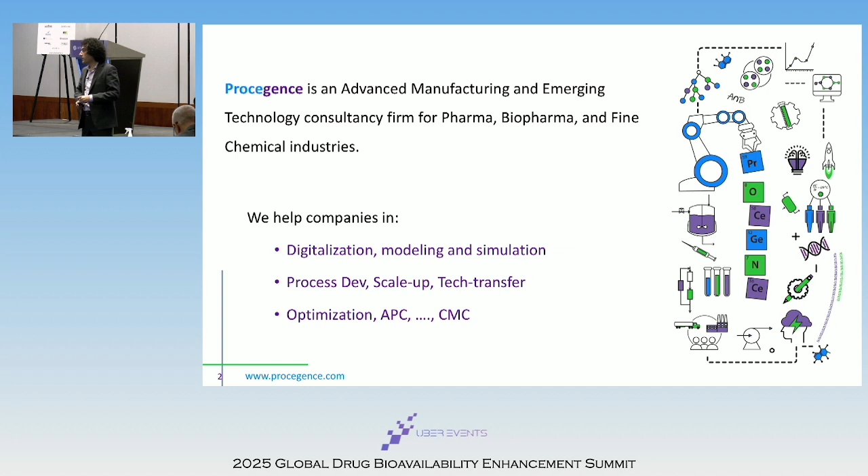So the first year was very challenging, but we grew. I have no financial investor, no partner, and now we have about eight people. So that shows the value of the service that we do. That has been organic growth. Our clients are very happy, pay for the services, and we have a couple of products in the market that help the companies to fast approval and also fast process development.

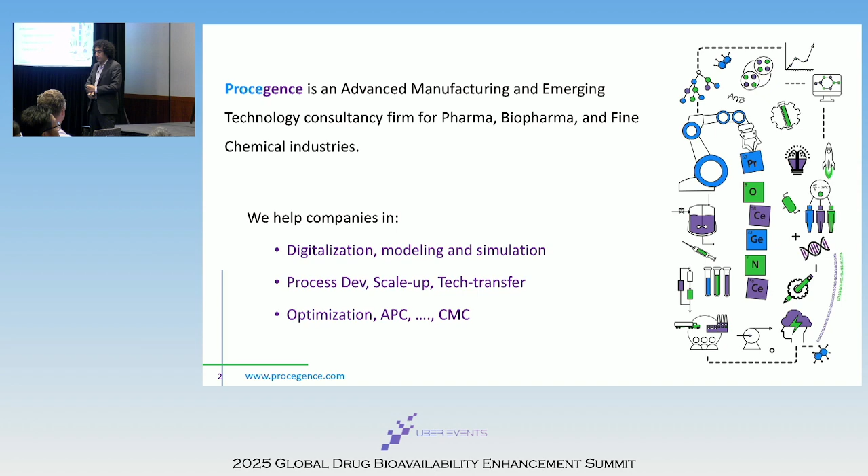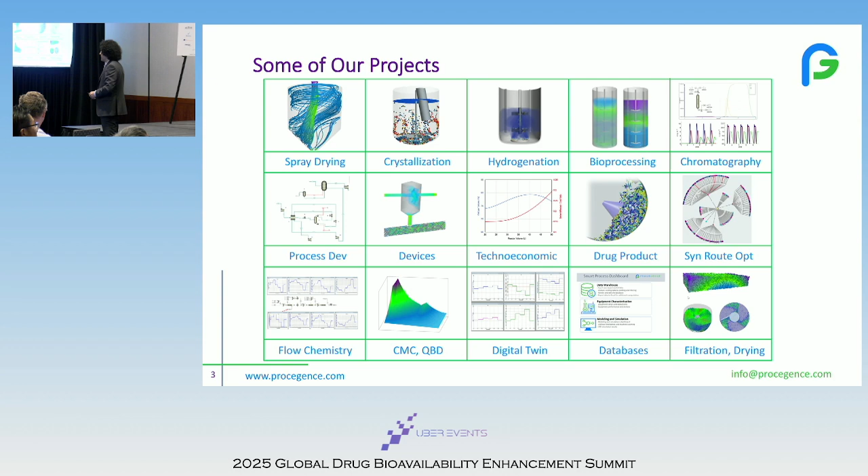So very diverse services and products, different modalities, different sizes of companies, all over the place from Korea to California. Here you can see some examples in small molecule, biologics, drug device combinations, and also some non-pharma. So today I'm just focusing on spray drying, the first one, but if you have a question on the other areas, happy to answer questions and discuss more.

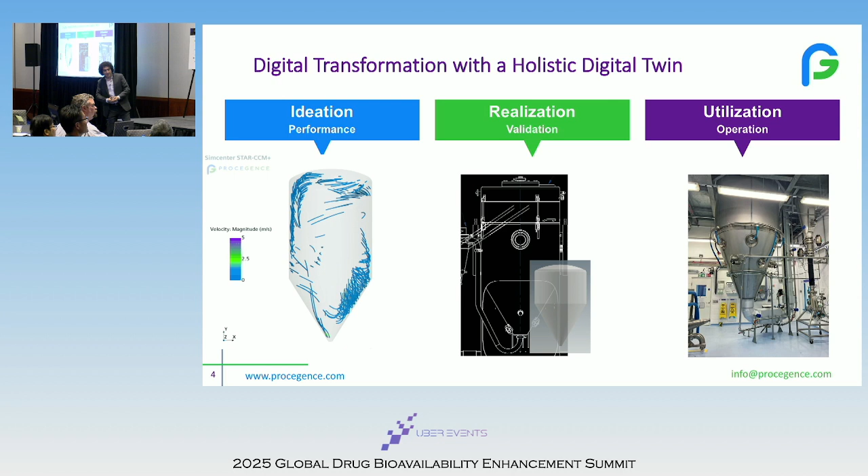So that's the approach. So the model that we use is like, oops, sorry, wrong button. So here is a kind of digital sandbox. So we make digital models on the computers. We try different parameters, different properties, different materials, without costing any money. I mean, you have to pay me to do this, but not the cost of the material or the equipment. Then we have to do the validation when we find the best result.

This validation, again, wrong button, sorry. So this kind of validation could be done at a smaller scale, at the lab scale. Then we can use the validated models for scale up to very large manufacturing equipment.

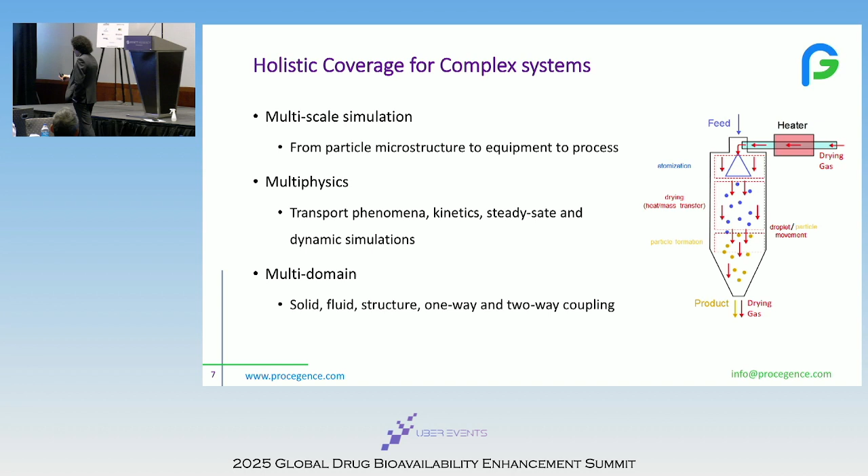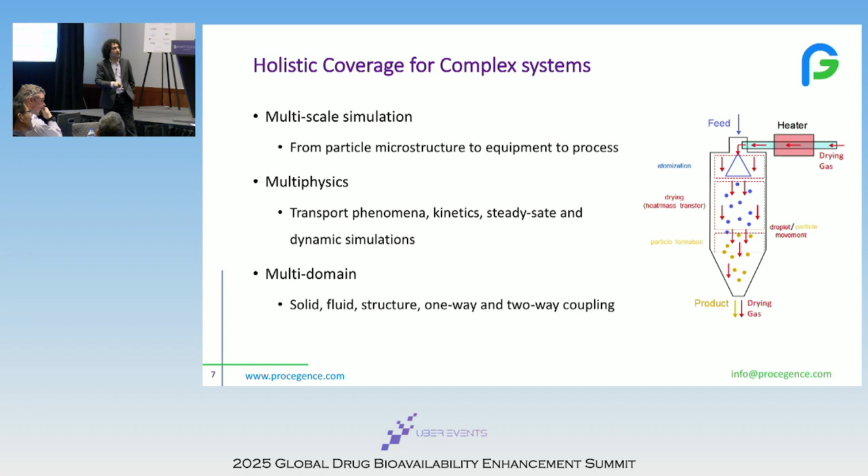Similar to crystallization. Crystallization is also a very challenging area, so we do a lot of services there. These are what we call Stefan problems, moving boundary conditions from the mathematical point of view. From the pharma side, spray drying or crystallization is at the end of the line. The material is expensive, and most of the CQAs of the material are defined there. Residual solvent content, particle size, stability, everything is defined here. So a very sensitive process.

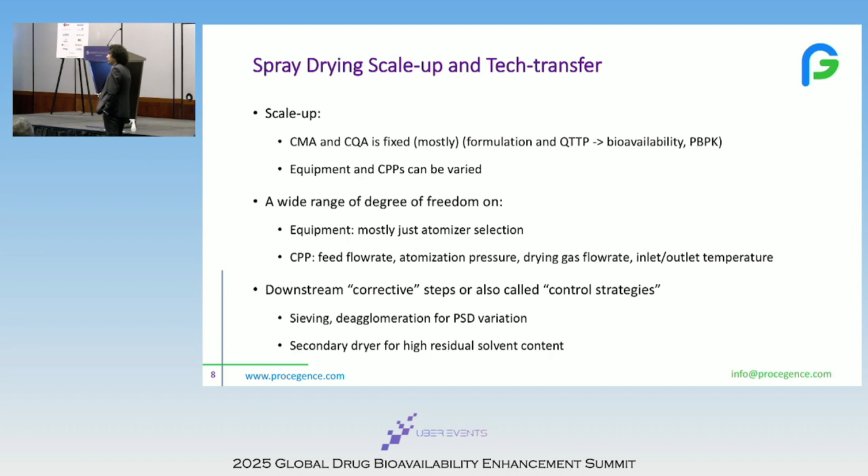Now for the scale up, as I mentioned, the CMAs and CQAs are mostly fixed, coming from the lab scale. That's what we developed during formulation and development. So we are not going to change the formulation. I'm not going to change the API to excipient ratio. And the CQAs for the bioavailability and the QTPP, we don't change. But what we can change is the equipment: what type of nozzle I'm using, what atomizer pressure, what drying gas temperature. These are CPPs.

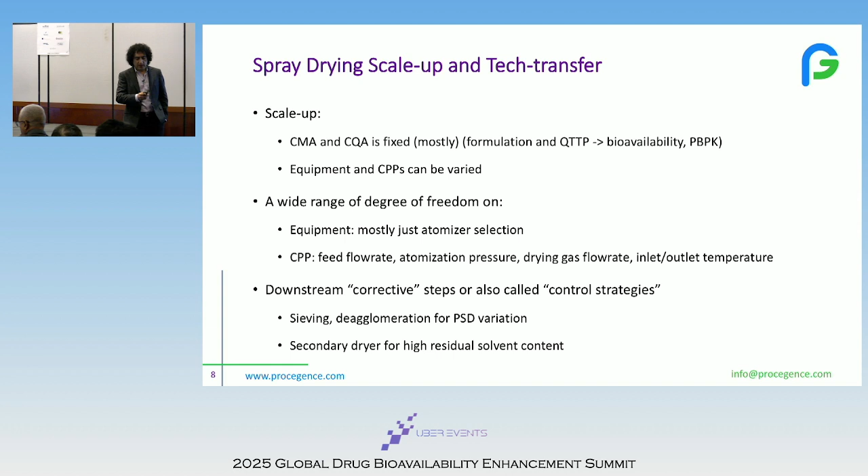That gives us a wide range of freedom to optimize our process, or to develop a design space: if I run at this condition, I can achieve that CQA. There are also downstream corrective steps that we call the control strategy in the CMC submission. If something goes wrong in my spray dryer, I can run my secondary dryer for a slightly longer time to get to the residual solvent content that I want. Which is not efficient, not optimum, but that's been common in the industry these days, right?

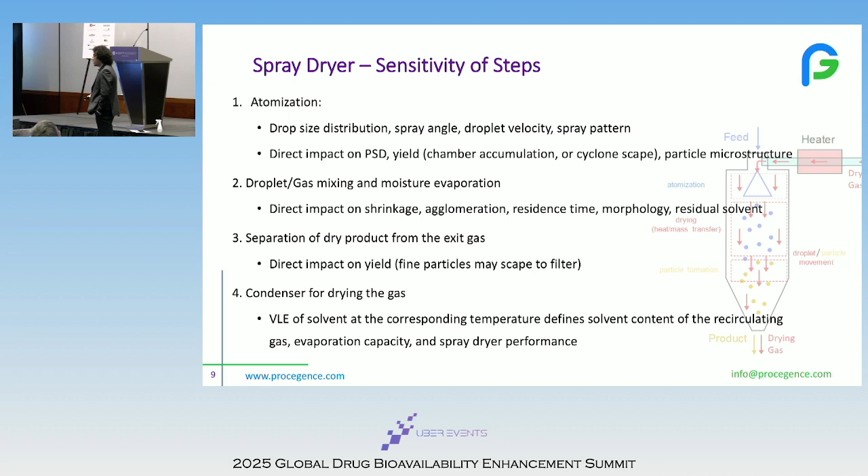So in terms of the sensitivities, we have atomization, which is a very important step in spray drying. From the atomization, the droplet size distribution is going to be changed, the spray angle. We have droplet and gas mixing and the evaporation, which gives us the shrinkage and how fast we are drying the particles. It's going to impact my component segregation from the surface to the core.

So if we want to have a perfect kind of mixing and keep it in the solid solution, we need to have a faster drying or a slower drying. So it depends on the molecular weight of the excipient versus API. Or if you have mixed solvent, let's say ethanol and water, or just pure ethanol. Ethanol water, now the API is soluble in ethanol, and the excipient is soluble in the water, but the vapor pressure is different. So during the spray drying, the ethanol evaporates first.

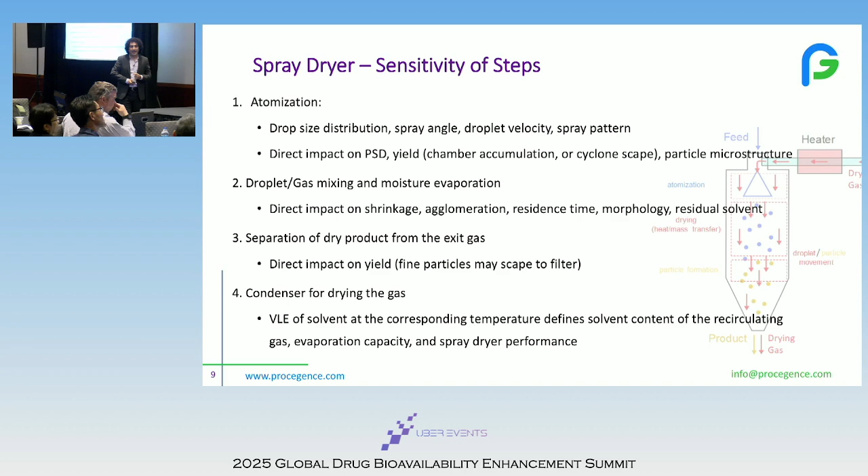So my API comes to the surface first. I end up with more solid on the surface of the particles. Now we have stability issues because most of these APIs are not supported or protected by the polymer matrix, right? So that's why we control this kind of drying rate inside the chamber to maintain the quality of the material as well. So we have to start from developing this knowledge.

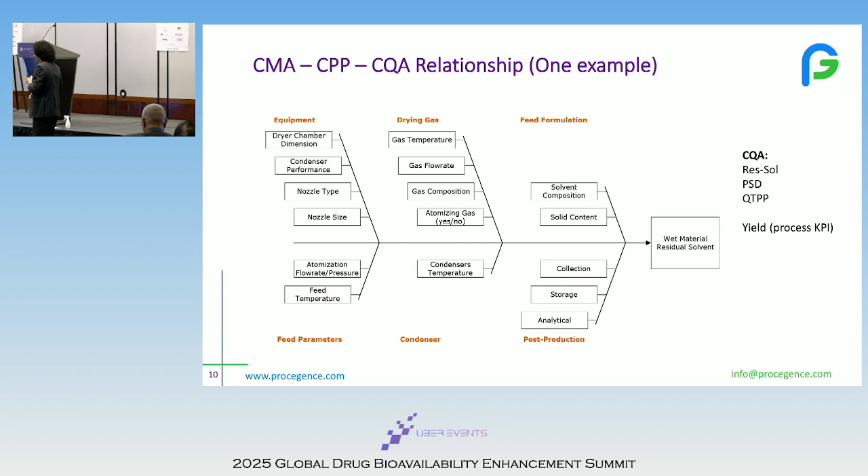As I mentioned, this is based on QbD, so putting all the parameters that are connected to each other and give us different CQAs. So this is a fishbone diagram, which we can develop for different properties. In this case, I'm starting with the residual solvent content, but you can develop the same thing for particle size distribution or even the process yield. What is the connectivity between the parameters, right? So if I can list 100 process parameters, then I have to run sensitivity analysis to figure out what are my 5 or 10 critical process parameters, right?

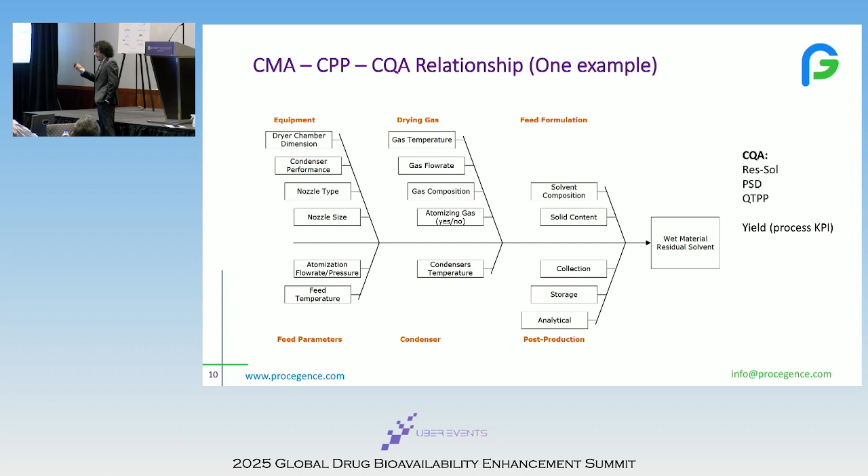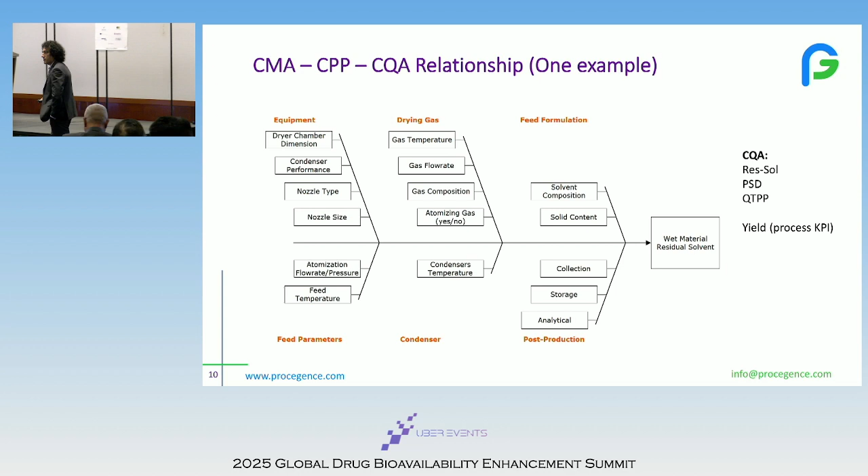So developing this knowledge of what is connected to what, and if I change, let's say, my nozzle type, what will impact my atomization, which is going to impact my particle size distribution, right? So that's where the modeling and simulation starts. Sitting together with the scientists, with the biologists, with the formulations people to think about all these things that connect together. So that's where we start our model. We don't start from math, right? We start from the science of the formulation and the biology.

So starting from atomization, I'll just go very quickly through the different steps. The first approach would be trial and error. We would have different options for orifice and the core, and also the material properties. If I have different HPMC or PVA or excipient in my solution, now the rheology of the liquid could be shear thinning or shear thickening, and that's going to have an impact on the droplet size generation. Higher temperature, higher pressure, or higher atomization gas is also going to impact the droplet size distribution. So that's why this kind of full factorial DOE is a combination of the equipment, the process parameters, and also the material properties.

We end up with about 600 full factorial combinations, which is not possible to do in the lab, right? Then we could do some study on what is the evaporation capacity of the spray dryer, what is the higher solvent content, what is the gas temperature. Then we get to this center region, which is more efficient to do the high fidelity models for. For example, now we started doing CFD to predict different combinations. This is very hard to read. These are the nozzles from Spraying Systems, like SK1627s and 7625, those combinations of the orifice and the core. Then we get this histogram of the droplet size distribution at each location at a time, right?

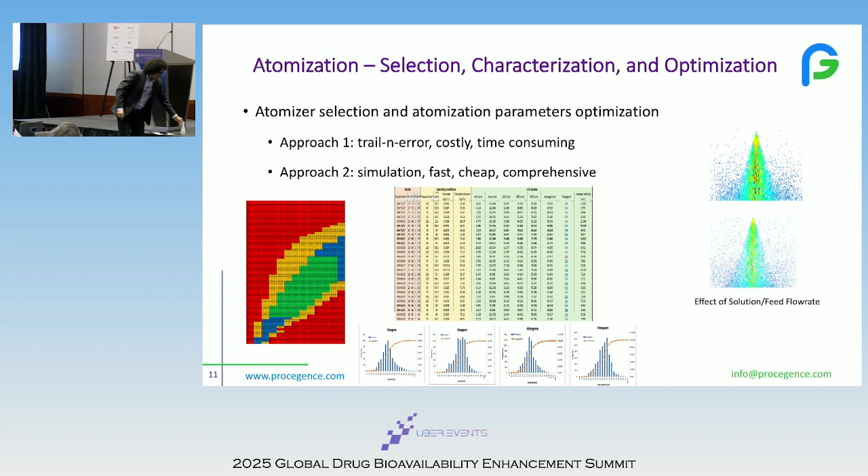So atomization, you are all familiar with that. Here is my spray, which is for my hair anyway, so I use it for demonstration here. So this is water, right? And now you can see with this water, with this atomization pressure, I have this wide angle. Now I'm opening up the thread, and what happened now? It's the same material, same pressure, but different. Now we make a jet, right? Instead of having a spray, with the same equipment, same material, now I have a different droplet size distribution, different velocity, different spray angle.

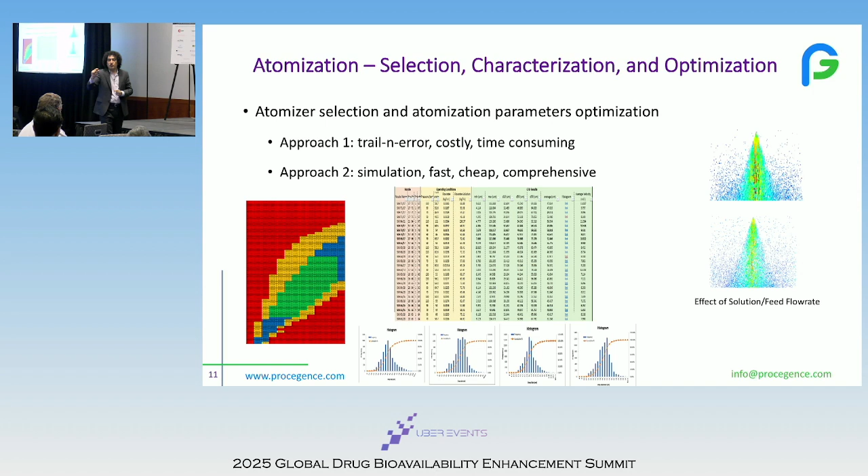In the GEA equipment, it's called a spacer. How thick is it, Andy? It's like half an inch, right? A ring of Teflon that we put on the lance. Then the location of the lance in the chamber goes up and down by about half an inch, and it's going to have a significant impact on your droplet size distribution. It's just where I'm releasing my atomized droplets in the gas, right? Just by half an inch, you can change your particle size distribution quite differently.

So that is one example from this simulation. You can see we are doing this kind of atomization simulation there and getting the population balance at different vertical and horizontal locations.

And why is that important? To develop these histograms to find the velocity of my droplets hitting the wall at this location, and is it still gooey, or is it wet, or is it sticky, but I have enough energy to bounce back. When I hit the wall, it's dry and bounces back. Or no, it's a slow velocity, still sticky, it's gonna hit the wall and stick there, right?

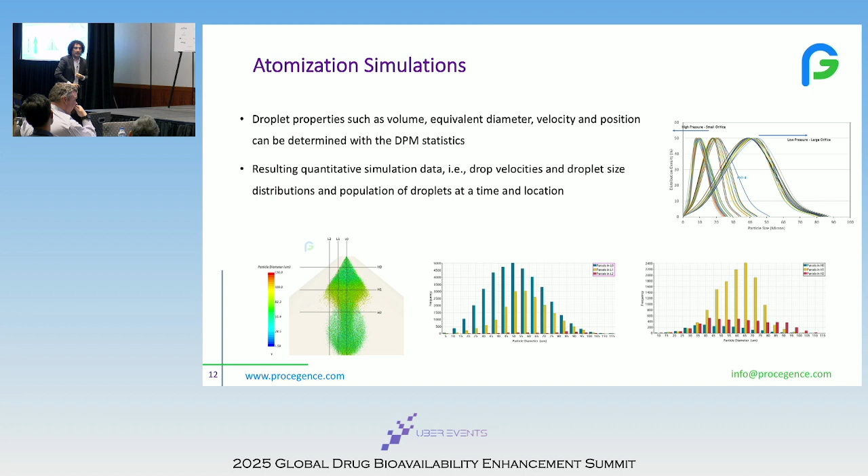Or what happened at the center, here you can see, now we would have coalescence. The droplets are gonna hit each other and coalesce together. So when you get an SEM image from your final product, you can see two different agglomerations. There might be just physical particles sticking together. That's the agglomeration from the cyclone. But if you see something like a bridge between the particles, that is happening during this stage, right? So optimization of the atomization and understanding how this works is very important.

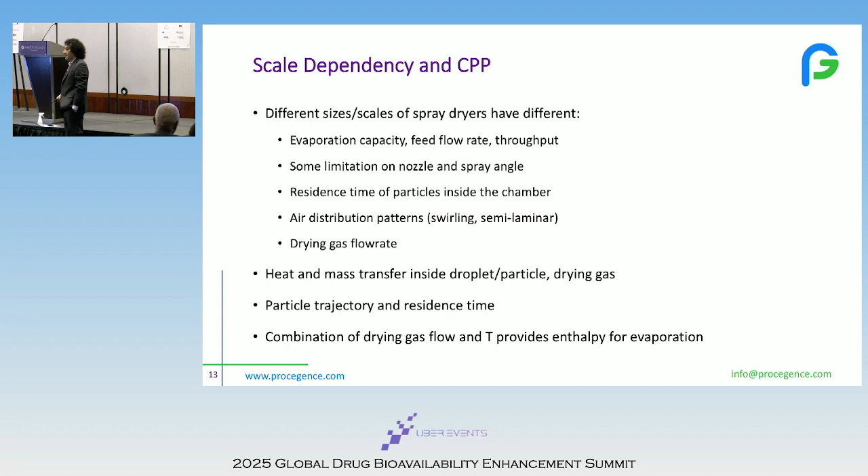So now we go into scale dependencies, there are scale dependent and independent phenomena. In general, for example, the heat and mass transfer, when you think about, let's say, bioprocessing or hydrogenation, the KLA, these are all scale dependent phenomena. But reaction kinetics is scale independent, that's a thermodynamic property, right?

So for a scale up of the spray drying, we have to consider all of these properties or aspects that are scale dependent when I'm increasing my chamber size, or when I change the diameter to height ratio of my chamber, so the residence time would be different in the chamber, right? These are all giving us different evaporation rates, different particle shrinkage time.

Now you can see here we're comparing the PSD3 and PSD4. These are normalized heights, based on the same PSD4. And when we design these evaporation models and put them in the simulation, now we can predict how much evaporation I have, what is the mass transfer gradient that we have at each stage.

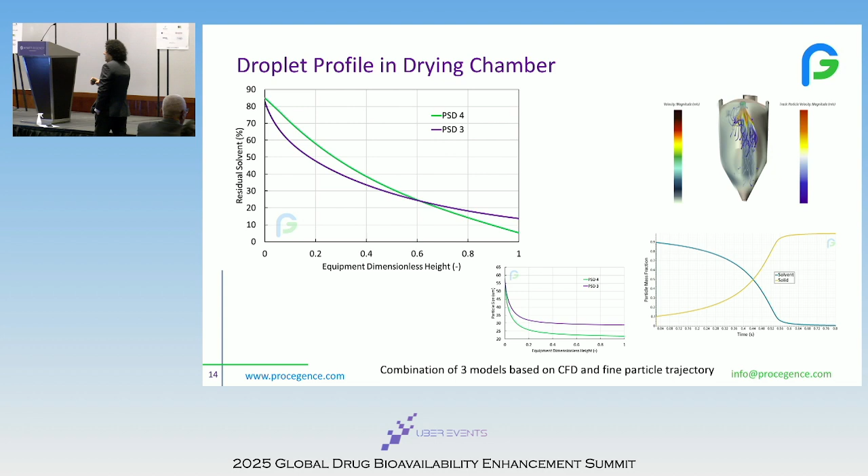And if I want to transfer from PSD3 to PSD4, or I have a site in Europe that has been using PSD3, now I want to come to the US with the PSD4, how we can do this kind of overlap of the knowledge and this kind of tech transfer very, very quickly. In this case, you can see PSD4 has a higher capacity, even with the same rate. So the PSD3 becomes kind of flat, because it has a lower evaporation capacity, this is smaller equipment, right? But at the same rate, we would have more capacity from the PSD4.

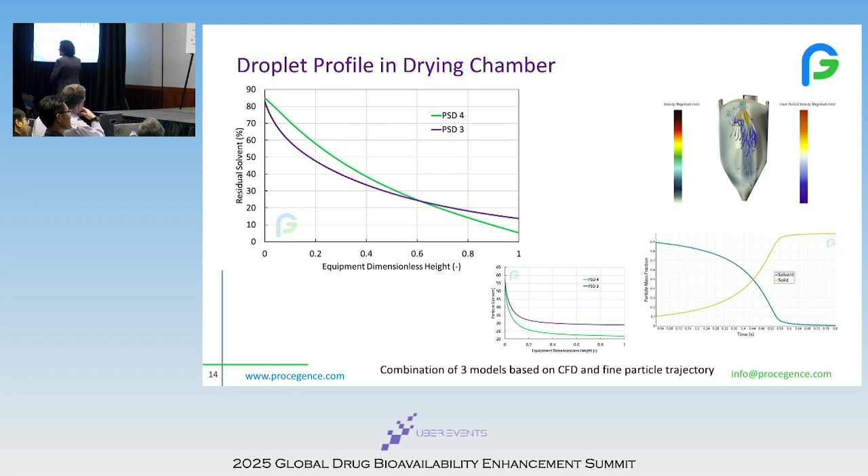That is kind of non-trivial because it's bigger equipment, but when you compare the ratio of residence time, PSD3 and PSD4 are almost the same height, but the diameter is different, so the residence time inside the chamber is different. That is the residence time in the chamber. So this is for the same material, same properties, same thing.

We have D10, D50, D90. Now we can see D10 stays a longer time in the chamber. D90 is heavier, is larger. It leaves the chamber in a shorter time, right? Now, what's going to be the problem? For small particles, the surface to bulk ratio is larger. Now we have larger mass transfer flux because the surface area is larger, right? And also we have larger heat transfer, so they are exposed to a higher temperature.

Now my D10 stays in the chamber for a longer time, which is time, right? And exposed to higher temperature, which is activation energy. So now think about the reaction kinetics. Most of the degradation, most of the impurities are happening in the D10. D90, we have large particles. Now the diffusion length is larger, so it takes a longer time for these particles to dry, and they stay a shorter time in the chamber, right? So most of my residual solvent will be in D90.

So we had a client 4 years ago, and they had an impurity problem. I told them, remove your D10, physically remove your D10, and your chemical purity goes up. And the formulation guys said, no, that's BS, it's not gonna happen. So they tested and it worked, right? Because it is science. I'm exposing the smaller material for a longer time, and we're gonna have more degradation there.

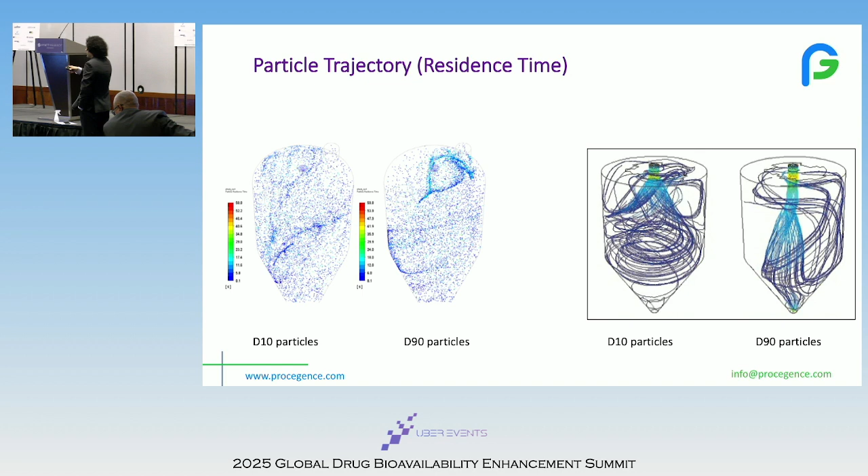Now, especially if you are designing the secondary dryer, it could be double cone, it could be tray, whatever design. Now you have to think about, if you have an average bulk moisture content, you have to normalize based on each particle bin. My D10 is gonna dry faster, in a shorter time, and my D90 is gonna take a longer time to dry. So we have to do this kind of breakdown of these particles and the moisture content per size of the material.

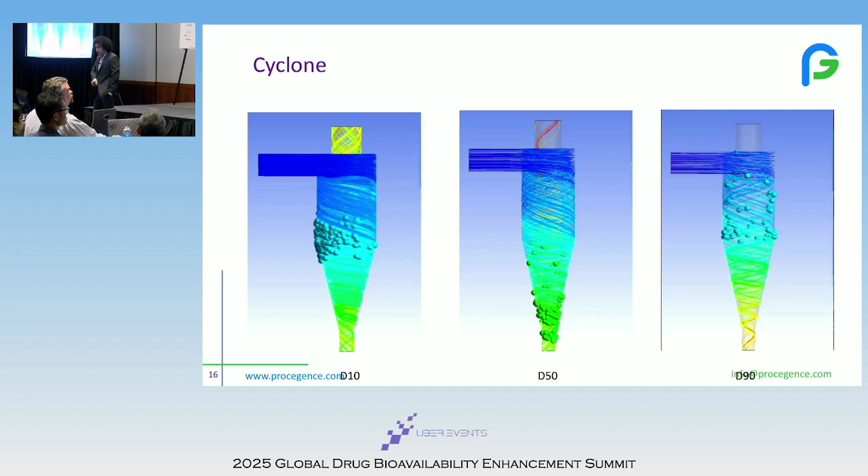Cyclone, so that's more for the design of the cyclone, and now I'm going to get into the regulatory submissions, how we are using the models to support the CMC. These models could be used for risk assessment, process development, and also the PAR and NOR and the design space. This example is for cyclone.

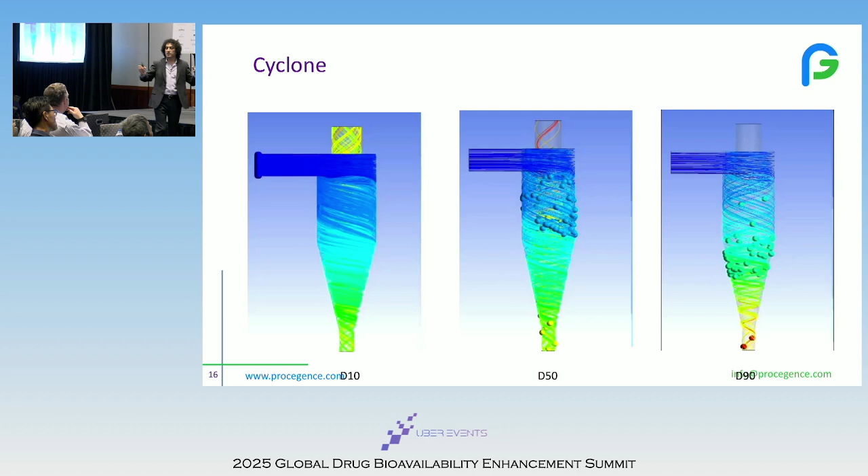That was the efficiency of the cyclone, right? You can see most of my D10 kind of escaping the cyclone at this flow rate of the gas. Most of the D90 is going to be all captured. Now, if you are changing the gas flow rates, my D10 would be less, and you know the particle size distribution is the statistical distribution of the sizes per bins, right? When I'm losing a portion of my D10, the whole thing shifts toward the D90, right?

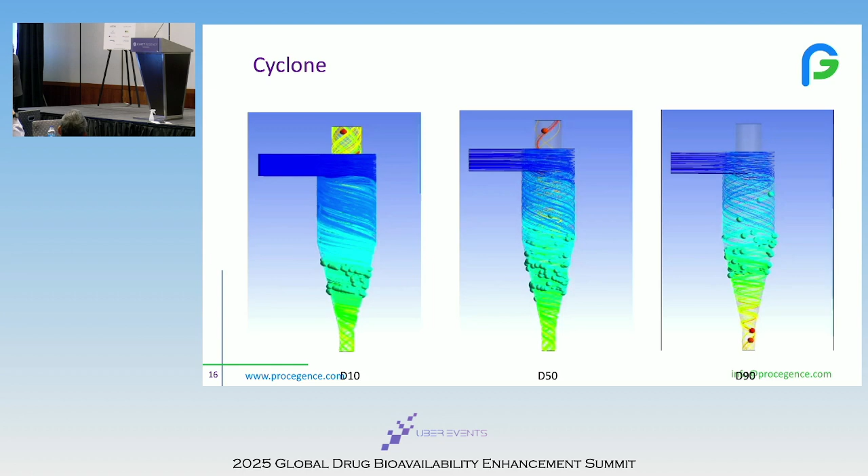That's the impact of the flow rate of the drying gas on your particle size distribution. Nothing to do with the evaporation and the shrinkage yet, right? It's all in the cyclone. That's one example. We have all the problems in the chamber later on, so I'm gonna get to that as well.

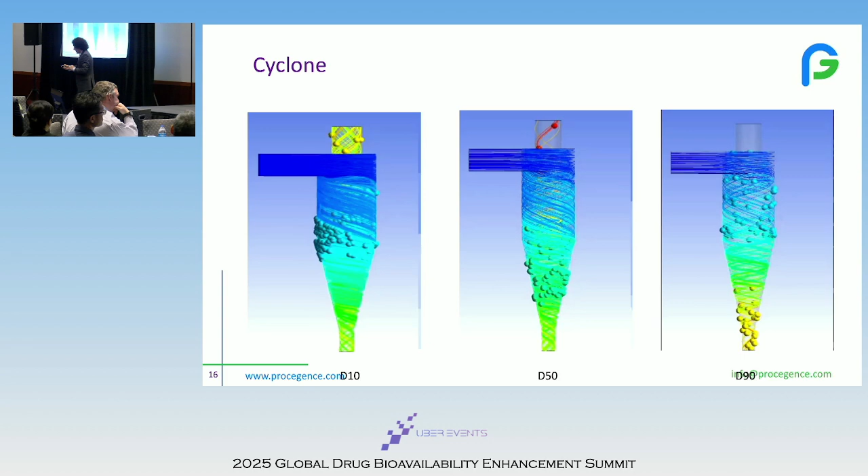So now we get into parametric studies, running a lot of what-if conditions. Now we can think about what if I keep my feed flow rate fixed, drying gas flow rate fixed, but change the drying gas temperature. What would be the impact on the powder temperature and the solvent content? Now we are running this kind of parametric study for different steps, for different intervals, and we get to some kind of knowledge of the connectivity of the parameters.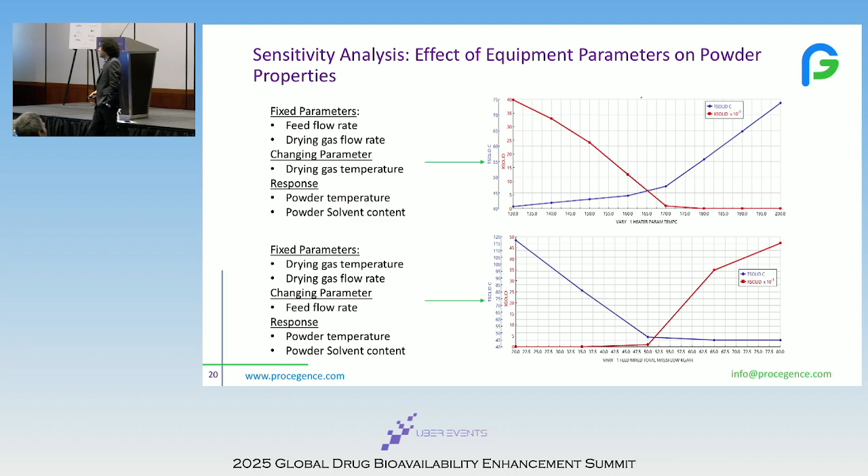So there's no way you could do the same level of exploration in the lab or in manufacturing. Now we are talking about PSD3. When you work with CMOs, how much do CMOs charge per day for PSD3, PSD4? Nobody going to tell me? No. It's something around $100,000 per day-ish, right? So this would cost like $1 million if you want to run it in the lab or in manufacturing.

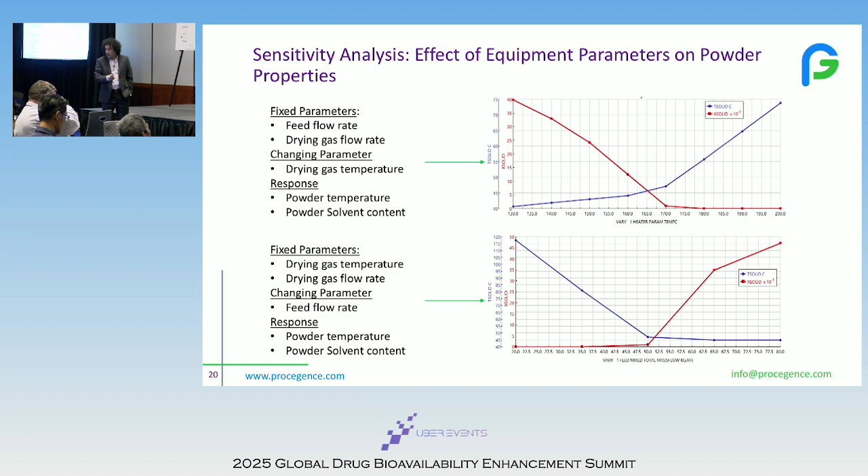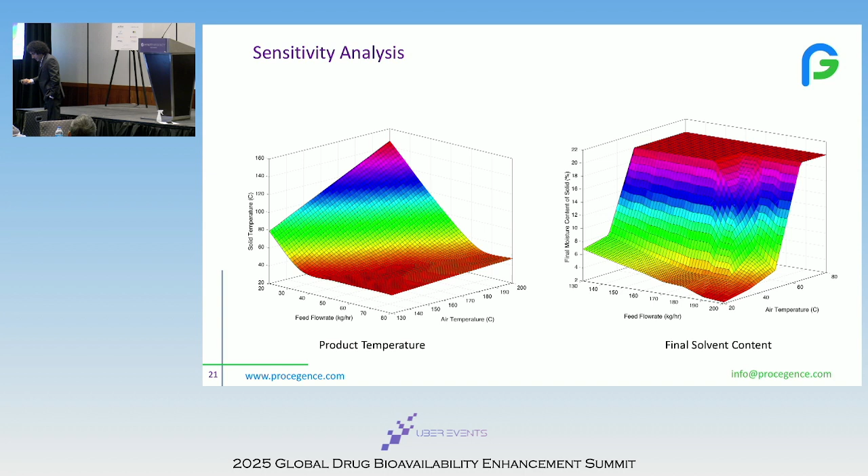So now combining many of these case studies together, we get to this kind of response surface. From here, I can use it for 3 different things. That gives me the design space. If I change my temperature, where I end up in the flow rate or in material temperature, that goes to the CMC package for regulatory submission. This also could go to the advanced process control for dynamic control of the process. If your feed goes down, how I can bring up the temperature to maintain the CQA.

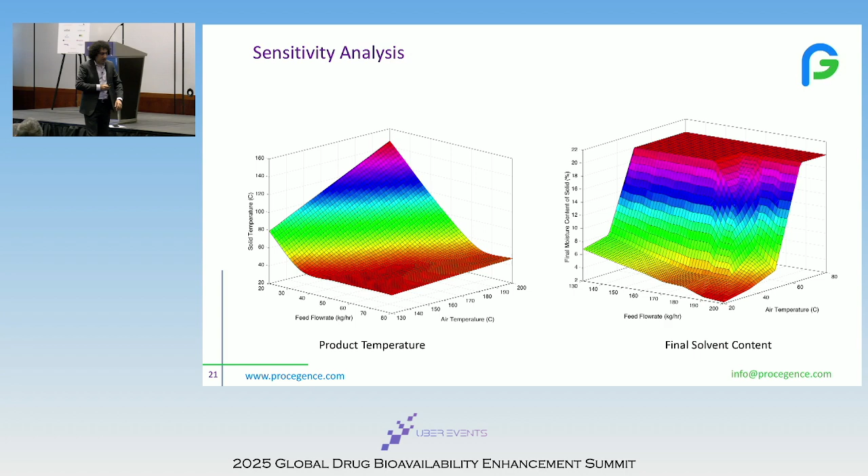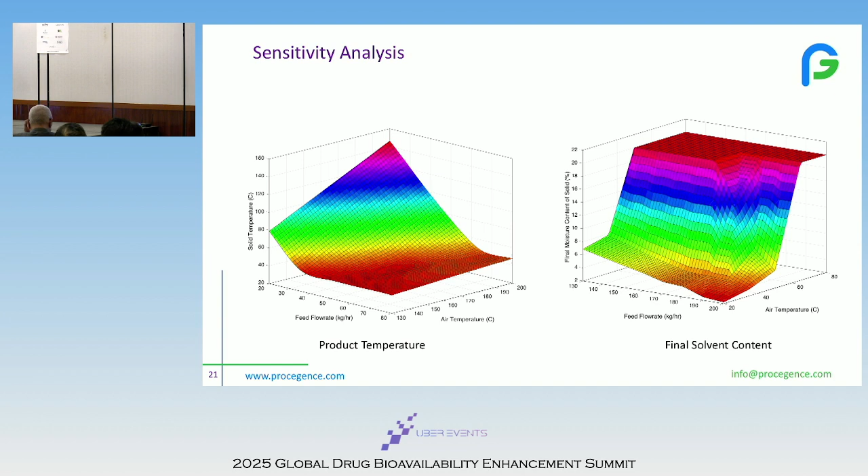You may think that this is very difficult in a regulated industry. We have done that recently, 2 years ago, and I can show you the results and how FDA liked that approach as well. So that's the design space. If you remember, here is more of a theoretical design space. Yes, I can run my spray dryer at 1 million degrees C, but it's not possible in the physical world because it's a very hot condition.

Now we're putting all these limits on what is the lowest solvent, what's the highest solvent content I reach, what's the highest temperature, yield, economy, all of these, and get to this kind of design space that is safe, that I can run my equipment at larger scale manufacturing, and gives me confidence in terms of the quality, yield, and the cost of the process.

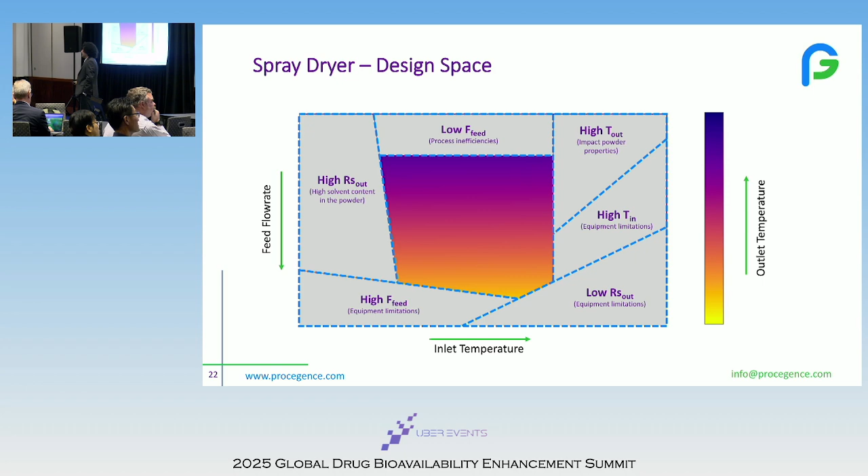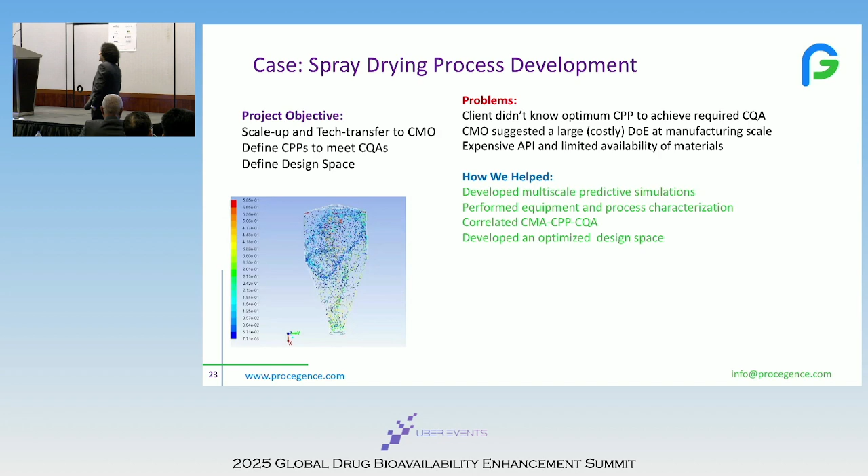They didn't know the process parameters, or what kind of CMA they have to use, or if they have to change their excipient, or how much they have to charge in the feed vessel. So that's the big problem they had, and also they didn't have enough material. They just had like 10 kilos of the peptide. Now running 1 day of a spray dryer needs like 130 kilos of the peptide. What can you do, right?

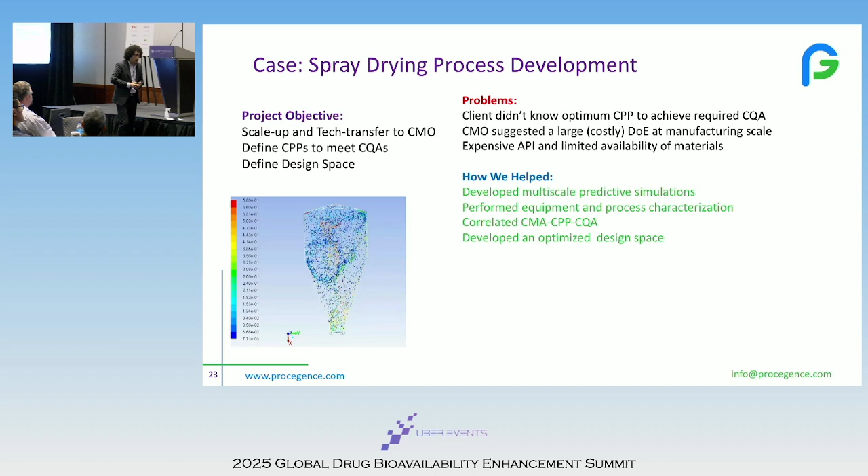So they thought about reconstituting the material and every time making a feed, but then it's not a continuous process. You have to break down every 10 hours to make the feed again. And every time they re-spray dry, because the peptide is heat sensitive, the impurity goes up and up and up, right? So that's why they came to us.

The CMO asked them for a 12-day DOE, about $1 million cost, and so we helped them with developing the models. They had a very fast process development, product development, and they saved $800,000 in like 4 days.

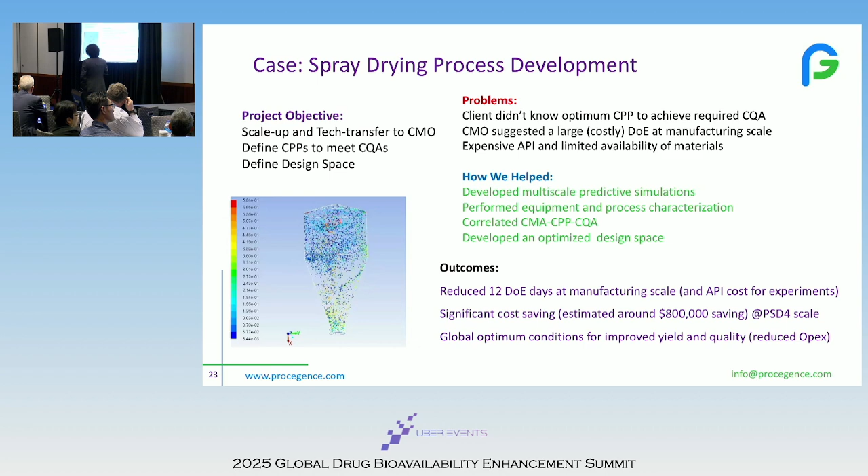You may say, okay, that's a good story, but how about the validation, right? All these models are sexy, colorful, and I can run a lot of smoke and mirrors, right? But when we go to the actual process, we need to also demonstrate the validation. Here's an example from Esteve Quimica in Barcelona. That's our client, and they said, okay, we don't believe in math. We believe in what we see. Show your simulation results first, then we compare with our experimental data. So it was a kind of blind test.

Now you can see solvent content, temperature, and the particle size distribution, and that was a very complex formulation in terms of the solvent composition and the material. We had API, excipient, a surfactant, and a binder. And you can see for dichloromethane and methanol the error. The blue one is error. The greens are model results, the purples are experimental data. So we had less than 5% error.

For temperature, we had 0% error for the outlet temperature, 4% error for the inlet temperature, and for particle size distribution, D10, 2% error, 6% error, and 9% error, right? So these were validated with experimental data by a third party. So everyone was so happy. They said, oh, we didn't even expect 30% error, so this 10% is marvelous, fascinating.

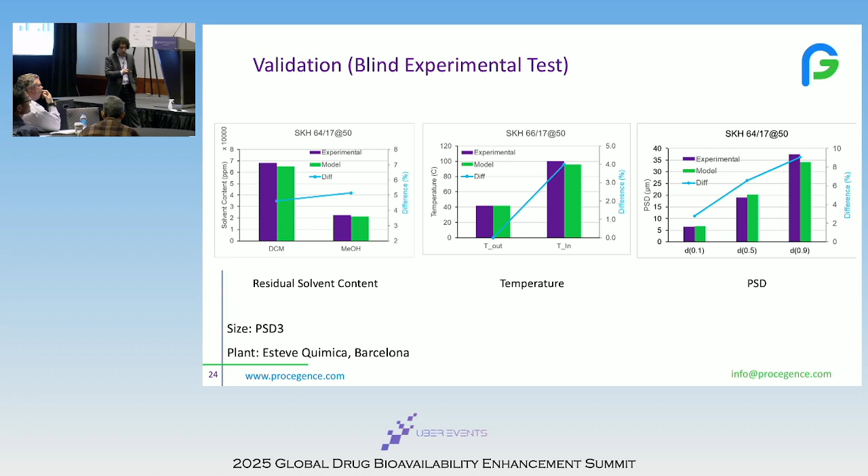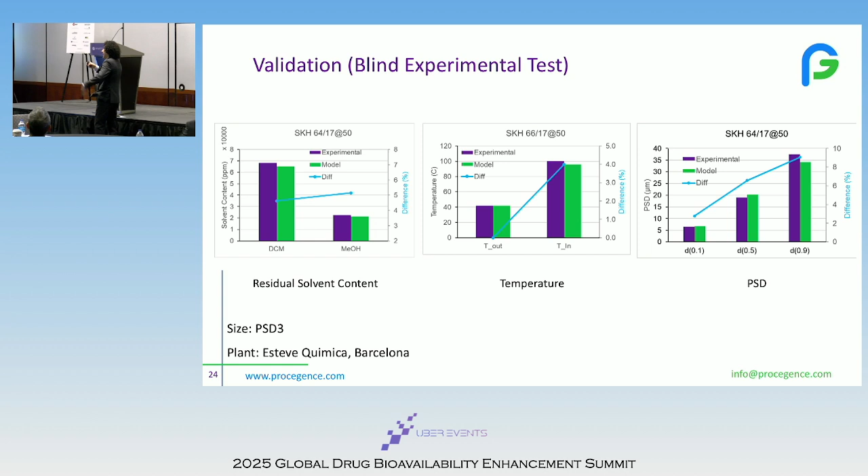And I said, absolutely, but I have a problem here at D90. Why is our D90 error too high? And they said, you're stupid, we are happy with the results, why do you want to change this? So then we started running different tests. They measure the particle size distribution by laser diffraction, right? So you scoop some powder, put it through laser diffraction, and you get a statistical average of the particles. But what we are simulating is individual droplets, individual particles.

Now we get to this problem. We collected a couple of SEM images and ran image analysis for individual droplets. You see we are spot on, the error was like 2%, 3%. But now we have these agglomerates. These are not large particles; they're clumps of small particles together that could form on the cyclone wall, on every surface. And these large things go through the laser diffraction and skew the entire particle size distribution to D90, right?

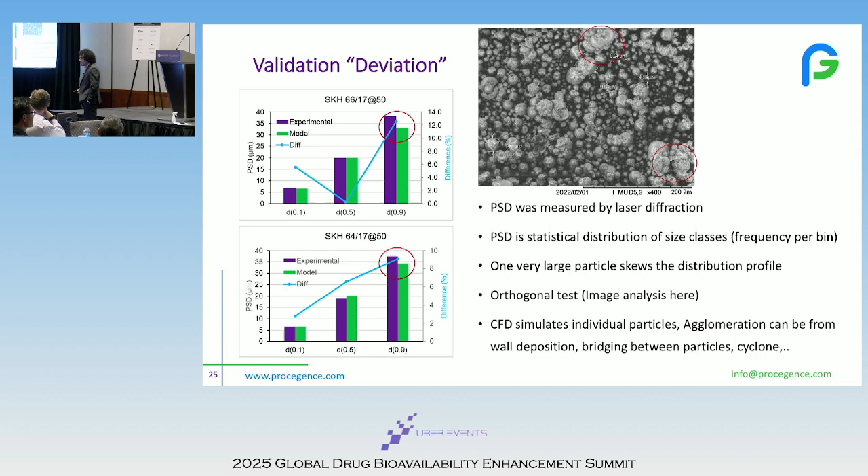If you take your powders from a spray dryer and just shake them or put them in a vibration ultrasound, your D90 goes down, because you're breaking them apart. They're not interconnected, they're just sitting on each other. If you separate them, your D90 goes down. So that was a nice study showing particle size was measured differently. So we need to have orthogonal tests. They did laser diffraction first, then we ran the SEM images, and we had a nice validation between the experimental data and the simulations.

I have many more backup slides, so please ask me more questions and I would have a chance to show them. As a quick summary, going back to my first question, what is QbD? You need to understand the connectivity of different things. What are the CMAs, and how are they connected to my quality attributes? If I change my process parameter, what's going to impact my material, my process, my product, stability, the patients, tablets.

In terms of the process development time and the cost, these models are very time saving and cost saving during the development time. Also, when we have an optimized process, it's going to be continuous saving over time, right? So instead of costing, let's say, $1 per kilo of the material in this bad design, now I'm making 50 cents per kilo. I'm continuously saving 50% over the next 20 years. Right? That's going to be a lot of saving.

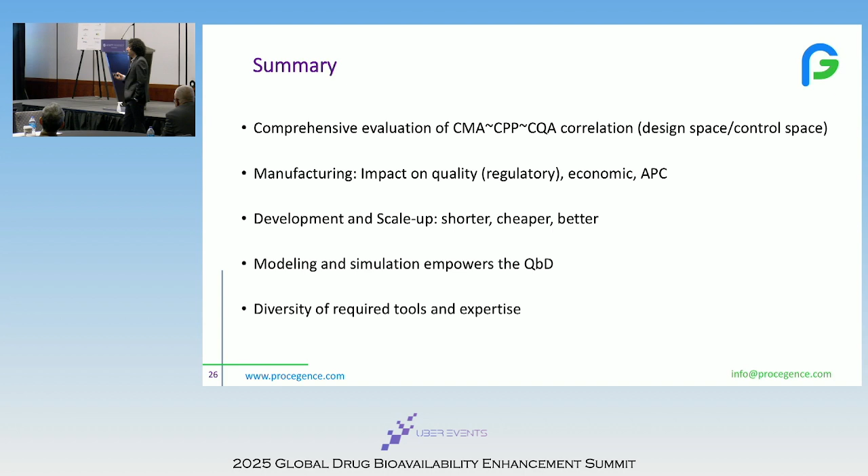So we had a client, I don't want to name them in the recorded session. We helped them to bring the product to market 9 months faster. During the process development, during the submissions, we also submitted the models to FDA, and FDA loved the model results, and they had a very fast review. When you have a blockbuster, the value of 1 day of a drug in the market is like $1 million per day. So 9 months is $300 million saving. They didn't pay me that much, but that's the saving they had.

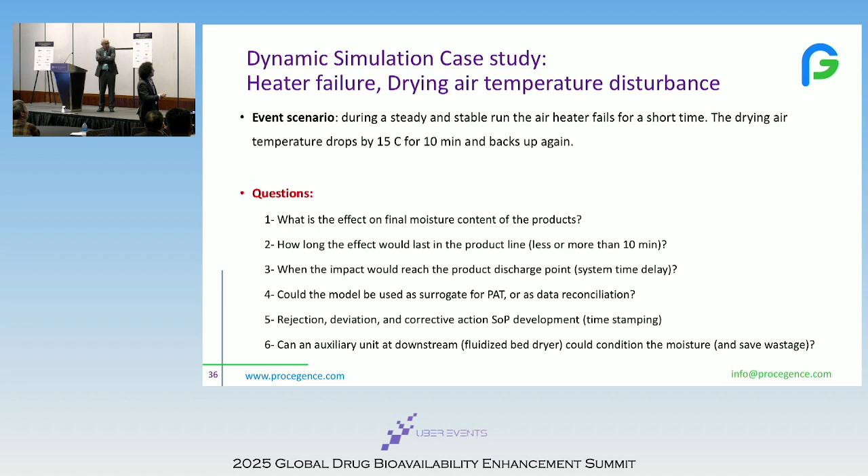Yes, I have backup slides. I'm not sure how we can manage this. I don't know where they are then. Never mind. That's fine. Don't worry.

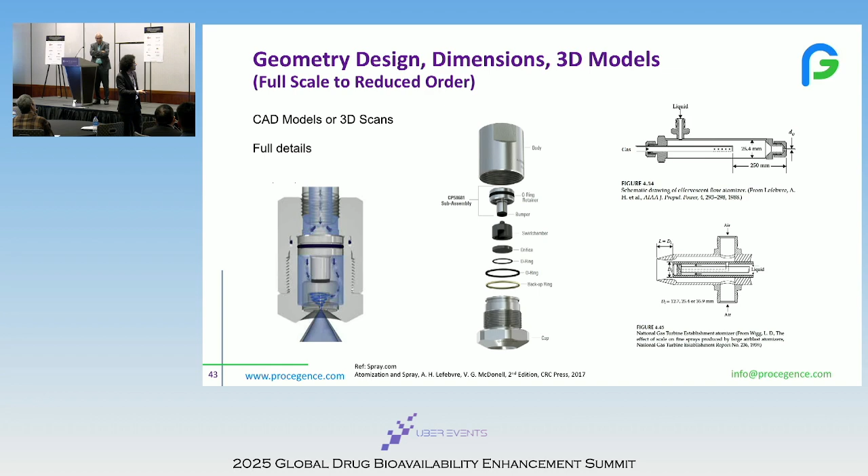So scaling down, for example, as I mentioned, like hydrogenation, right? So is it for drug substance? You see it is. Especially for the drug product, like spray drying, no, it's not going to work, because when you scale down, you would have a different nozzle. Could you go to slide 2, please? Sorry, I cannot count, this one.

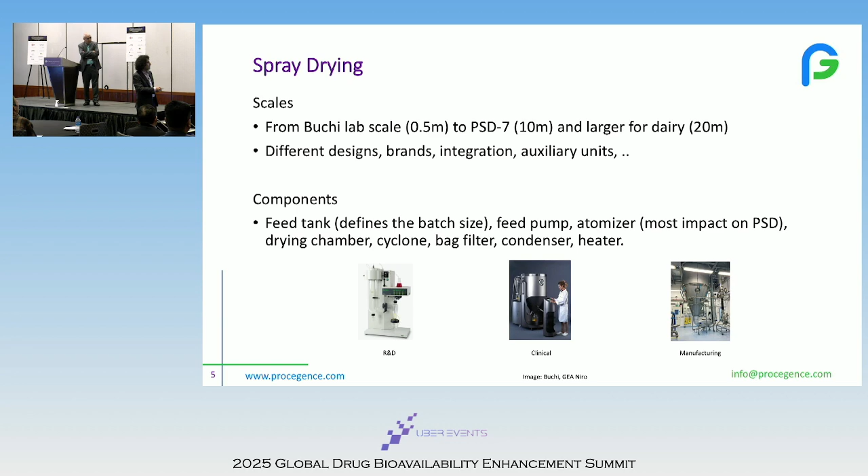When you scale down, so this is your final goal, right? This is the high pressure atomizer that you can use in this spray dryer. If you want to scale down, you cannot use a high pressure atomizer in something like a Buchi. You can buy one of the Saran's equipment, but that's a different story, or like the Procept. So to scale down, now you have to change the rheology of your material. You have to go to lower HPMC or PVA, because if you go with a very thick viscosity, it cannot go through this nozzle. So the scale down in this case is not going to work, because it's not the same equipment anymore. It's going to be totally different new equipment.

Did you simulate the bigger particle size with the ultrasonic nozzle or something else rather than a pressure nozzle? Yes, you can, as you mentioned, like membrane or piezoelectrics. There are different ways to make the different particles, right? What's happening here is what we call the interfacial forces. When we are releasing droplets from this core, how much pressure am I putting on this skin? If I gently touch my skin, nothing happens, right? But if I apply too much pressure, you can see it becomes red.